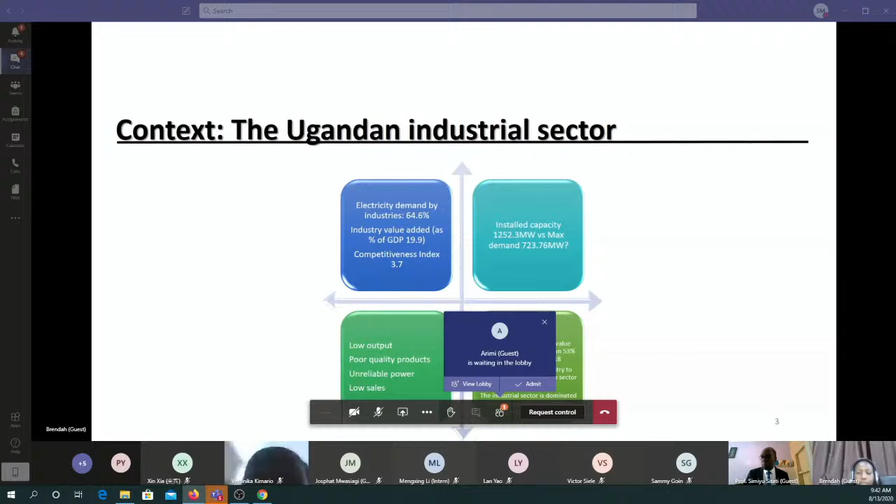Ladies and gentlemen, this study's aim was to examine how electricity consumption influences industrial output. This study was also guided by the following methods and materials. It used time series data, which was obtained from World Bank surveys, including the World Bank Doing Business 2019.

Time series have a little bit of limitations, and one of them is spurious results. So we managed this by testing for normality using the Jarque-Bera statistics. We also tested for stationarity using the augmented Dickey-Fuller test for unit roots. And we went ahead to carry out a co-integrated vector autoregression to estimate the model, which we used to run a long-run relationship between industrial output and the other variables: electricity consumption, education, and labor employed.

Ladies and gentlemen, these are our key results. From the results, we discovered that electricity consumption matters for these industries to develop. Education is very key, and also labor employed is very key. From this model that was estimated, we have an adjusted R squared of 41.5%.

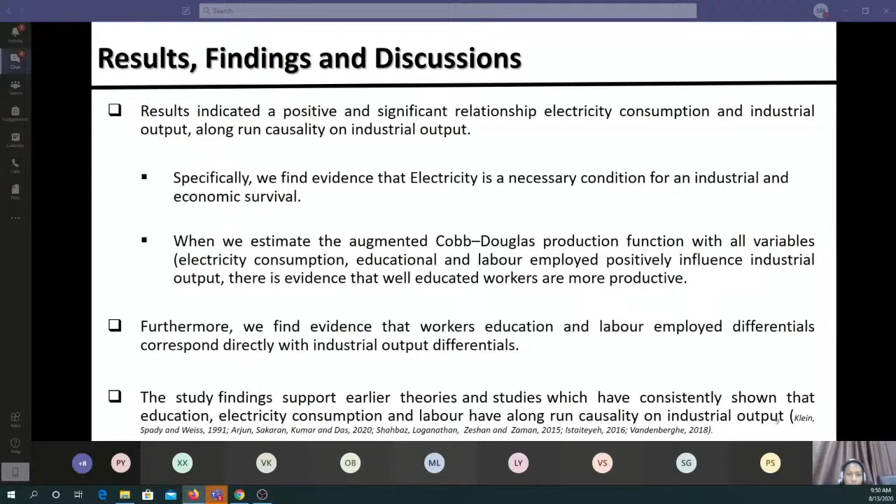So from the study, we therefore recommend, since electricity consumption matters, the government and policymakers should invest in consumption mechanisms such as through subsidies, so that the current electricity tariffs can be affordable to these firms, but also provide reliable electricity supports, because currently the main source of electricity that we have is from hydro, yet we know that there are other many alternative sources that can supplement or help industries to go on.

But we also recommend that there should be joint industry energy inter-service task forces, whereby our regulators in the energy sector should really be in touch, should encourage and train these industries to access and use electricity so that they can achieve sustainable production and consumption.

And then, since we found that labor employed also matters, or has a long-term relationship on industrial output, we also recommended that there should be focused efforts on the labor employed mechanisms that can help these firms to increase productivity, such as accelerating learning processes for dynamic capabilities at all levels, that is both micro, meso, and macro levels of these industries.

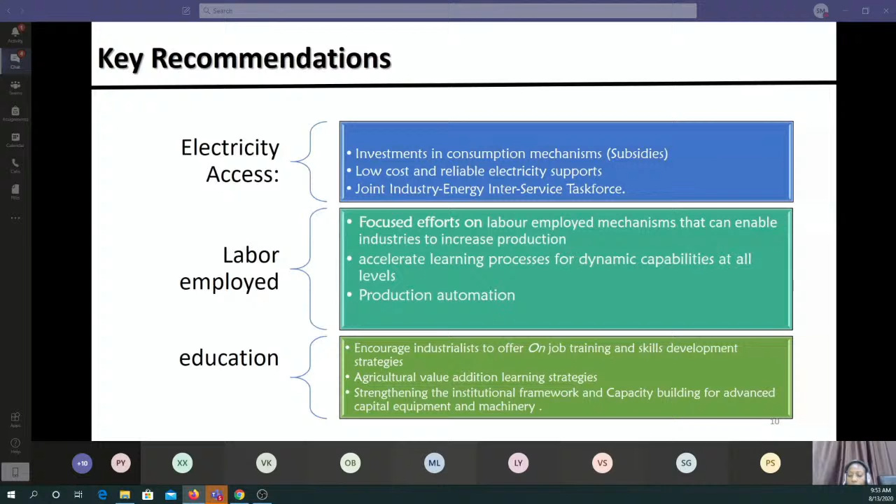This is for policymakers and capacity building for advanced capital equipment and machinery to enhance production automation. And when all this is done, we highly believe that industrial output will be achieved by these industries.

So we go on to conclude by saying that the study results suggest that industries that consume electricity will actually have a higher output than their counterparts. And we also conclude that well-educated workers with productive labor employed will produce more because they contribute more to the firm output. And the key positive result that emerged from the findings is the important role of electricity consumption, holding other factors constant.

So the results imply that the estimated results from our vector error correction model provide a good estimate of a real industrial output differential, at least for workers in the agro-based industries sector.

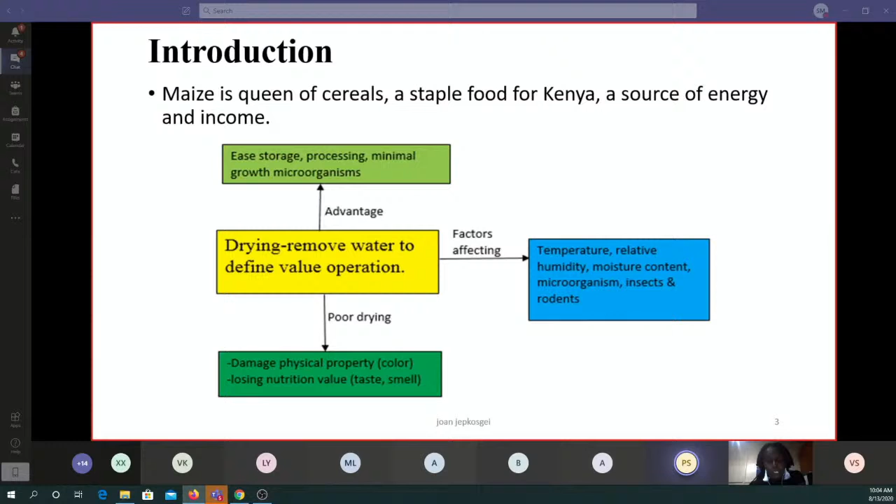Factors which affect drying include temperature, relative humidity, and moisture content. The aim of this research was to design and fabricate a heating system using solar evacuated tubes to produce heat that can be used to dry farm products.

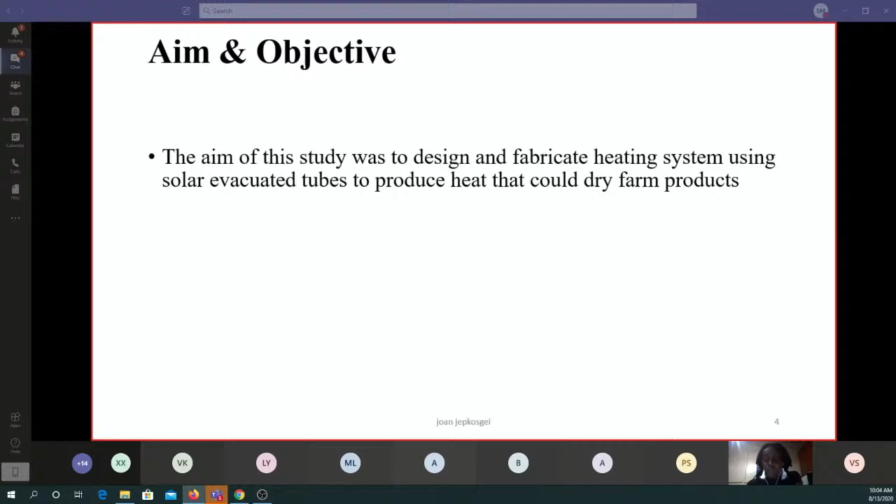Justification: drying is classified into two types, natural drying and mechanized drying. In natural drying we have sun drying, which includes spreading the products over a flat sieve, plastic sheet, or cement. The disadvantage is that the products will be exposed to insects, rodents, birds, or even rain showers during the rainy season.

We can also use in-crib drying, which is storing the product in a perforated room. The disadvantage is that it takes a lot of time to dry because the products are already packed and there's low airflow. In mechanized drying we have shallow bin, shallow layer, bin, batch-in-bin, and fluidized beds. The disadvantage of this is high energy and fuel consumption.

We have a group of solar dryers which falls under direct solar dryers, which commonly use the greenhouse effect, or indirect solar dryers, which use solar flat plates or the solar evacuated tube, and mixed mode solar dryers, which combine both direct and indirect. The disadvantage of this is high installation cost, and it also depends on sunshine.

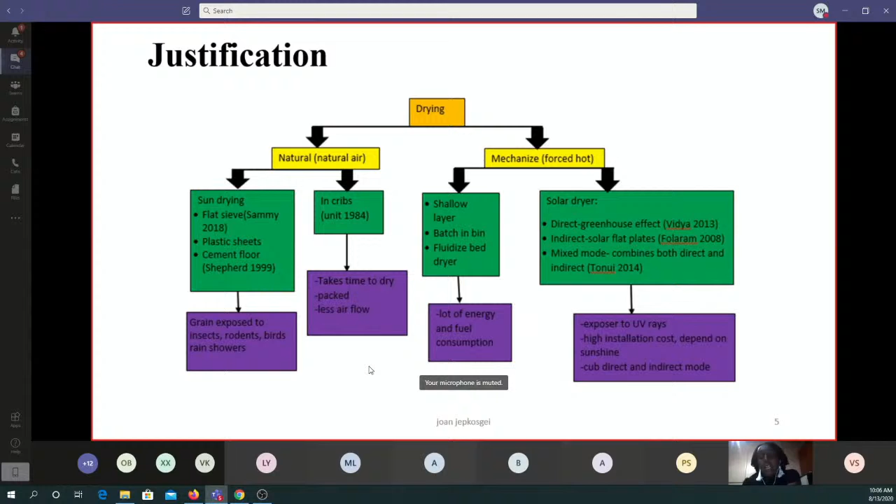For my system, I had to find a solar evacuated tube and also create a manifold.

My solar evacuated tube specifications include that it's made up of a special selective coat, made of aluminium, with an internal diameter of 47 millimeters and external diameter of 0.057 meters. It is a one-open-ended tube with a length of 1.8 meters, and it has an absorbing area of 3.7 meters square.

The manifold is made up of a frame made of wood, with measurements of 0.74 by 0.1 by 0.196 meters. This was to hold the tubes in place and keep them safe from damage. I also had a circular pipe made of aluminum, which is a good conductor of heat.

So how does this system work? Air is blown into the system by the blower. This air enters through the aluminum pipe and out through the internal part of the solar evacuated tube, then into the chamber where we can see the circular pipe, and then out.

The temperature being measured was the environment temperature, which is the ambient temperature, and the temperature we get at the end after it has gone through the solar evacuated tube system.

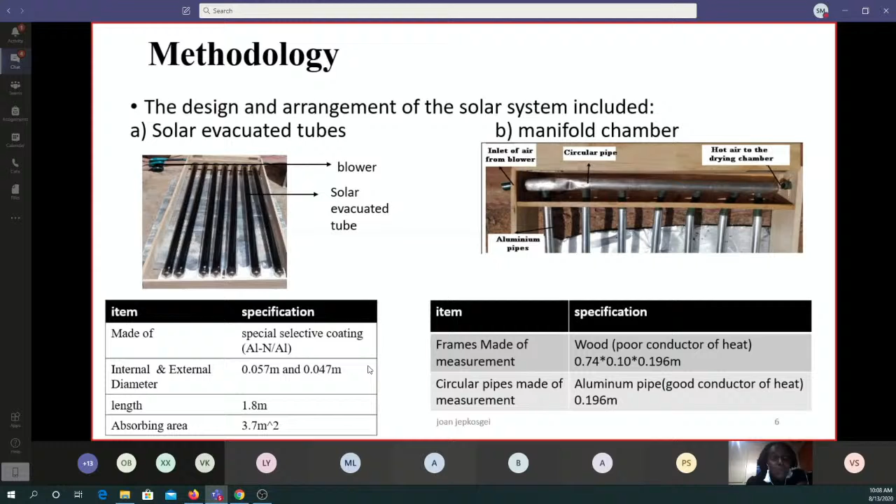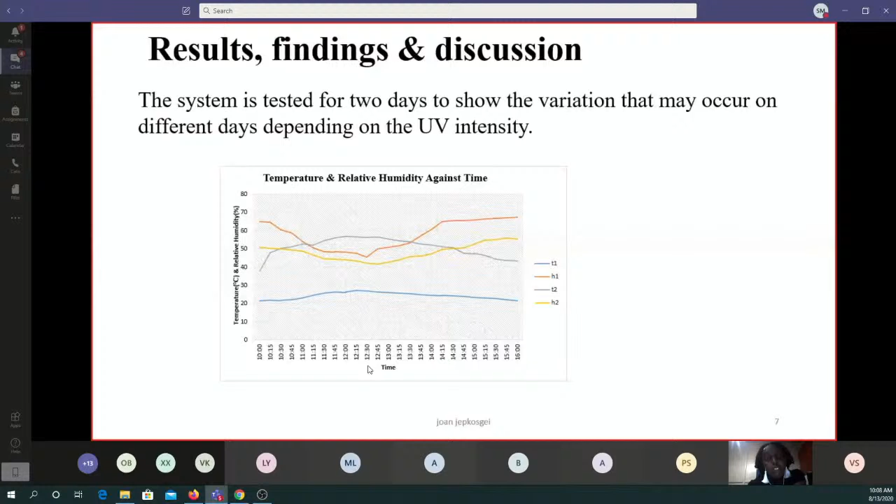This is the graph that we got; the test was done for about 2 days, because different days have different UV intensity, so we got different temperatures and relative humidity. At the inlet, the temperature was as low as around 21.7, but as the day progressed to around 12:45, the ambient temperature was 26.2, and in the evening around 4 p.m. the temperature was 21.5.

The relative humidity at 10 a.m. was 64.7, which decreased at 12:45 to 48, and at 4 p.m. it was 67.2.

After passing through the system, the temperature was able to increase as time passed by. In the morning at 10 a.m., the temperature of 21.7 was raised to 37.5; at midday, it was raised from 26.2 to 56.7; and at 4 p.m. it was raised from 21.5 to 43.6.

So the relationship was that relative humidity was dropping as the temperature was increasing. Hence, when the moisture was dropping, this could allow more room for the air, if used for drying, to absorb moisture from the product being dried.

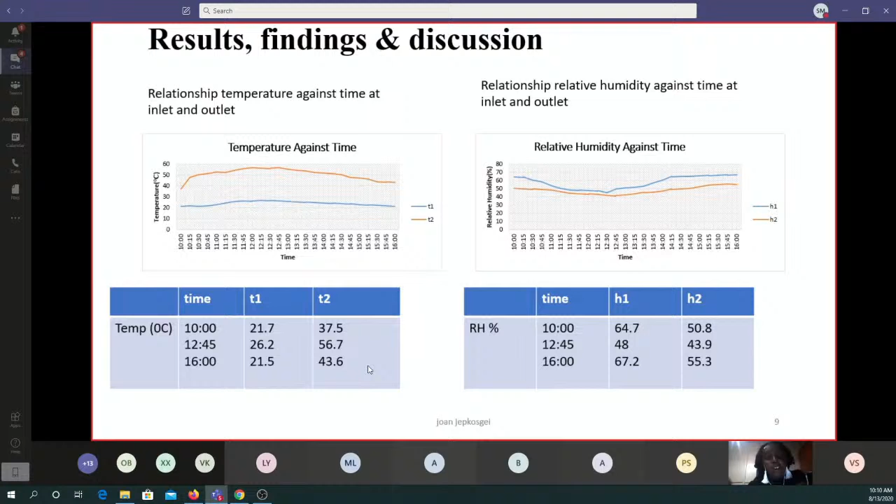So from my research and the variation, I was able to fabricate and increase the temperature of the air to the highest temperature, which I got 56.3 degrees, and the relative humidity, which dropped to 42.1 in the midday. From my finding, the temperature needed to dry maize grain is between 30 to 60 degrees, of which I was able to get 56.3 degrees, which I believe means my system could actually dry a farm product.

Hence, I would recommend that people use solar evacuation, or research can be done on using a double open-ended solar evacuated tubes. So there is my reference.

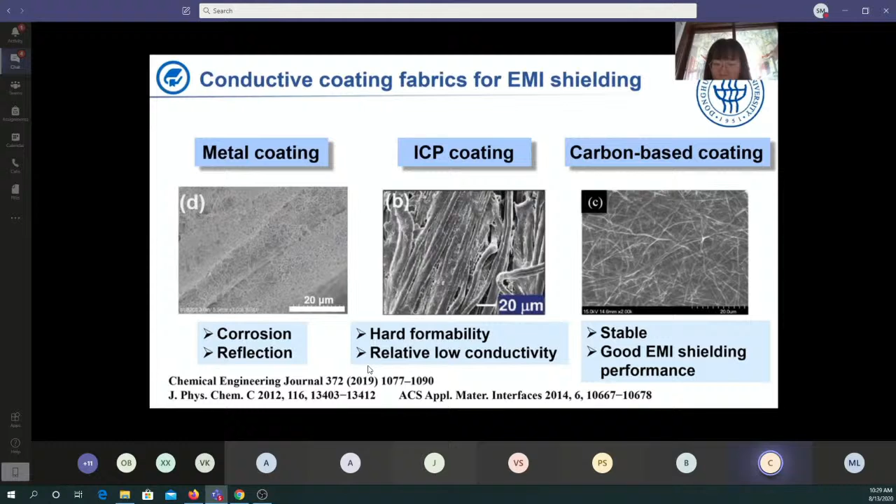Lightweight and high performance are two characteristics for the next generation of EMI shielding fabrics. From the equation for shielding efficiency, we can see that higher conductivity will result in higher shielding efficiency. But for the nano composite, the content of the nano fillers is always low because of the processing steps.

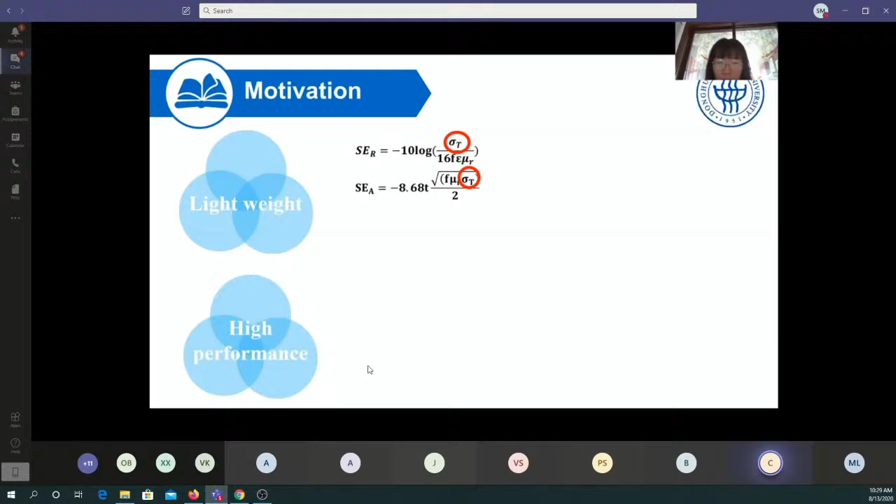Therefore, for many researchers, they will increase the thickness of the coating, which will decrease the performance and increase the weight. So if we want to achieve lightweight and high performance shielding materials, we need high conductivity with no added thickness of the coating. Optimization of coating structure is one important method to achieve lightweight and high performance EMI shielding coatings.

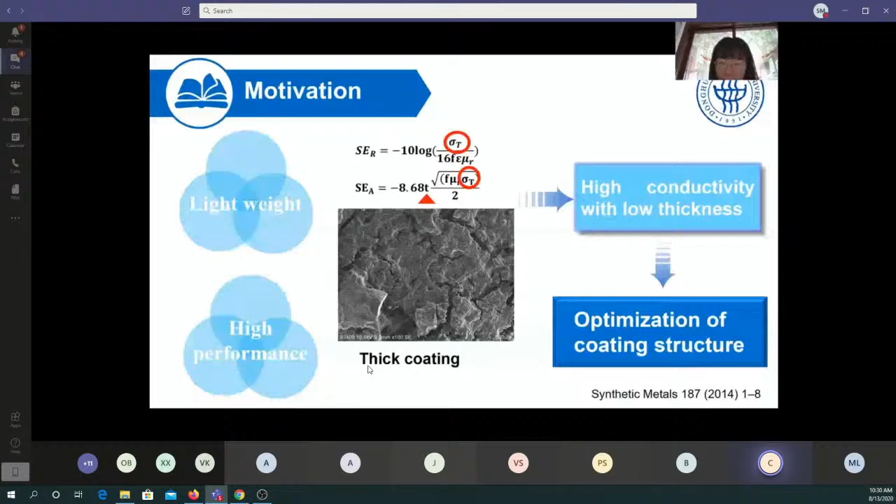In this way, we use a layer-by-layer assembly for CNT coatings. Here, we use CNT and PAH as a building block for EMI shielding fabrics, and the obtained fabrics using a high CNT content reached 85.4%. However, the EMI shielding efficiency of the fabric only reached 0.5 dB, while the high content CNT only resulted in poor EMI shielding performance of the fabric.

We also checked the conductivity of the materials. The conductivity of the fabric is low. Even after 15 cycles of assembly, the conductivity was only 0.4 Siemens per meter. To solve this problem, we use

capillarity-assisted assembly for CNT coatings. For this method, instead of rinsing the fabric in water to remove the physically absorbed CNT on the fiber, we dried the fabric directly to absorb the CNTs and PAH on the fabric, which increases the deposition of the film. The mass of the deposition of the film was dramatically increased by using the capillarity-assisted assembly.

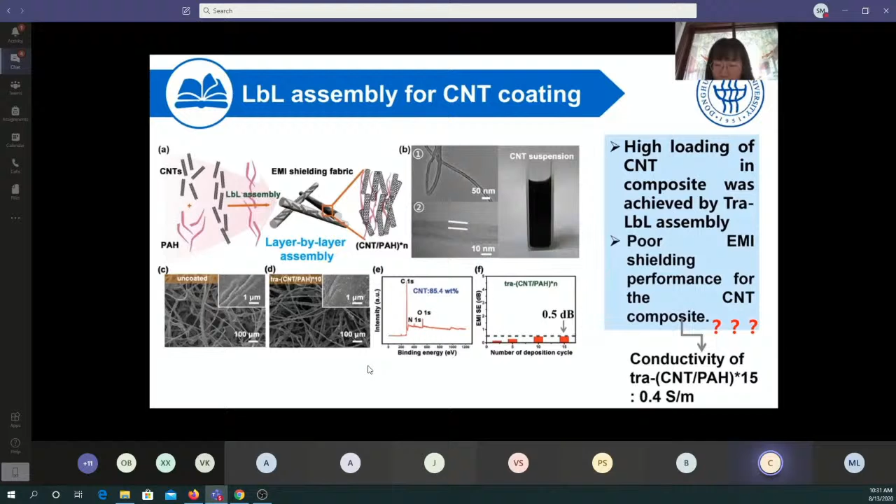performance of the fabric. After the first deposition cycle, the axially aligned CNT were prepared, and they are well aligned with the axis of the fibers. Thickness of the coating is 1.5 micrometers, which is among the thinnest thicknesses of conductive coatings.

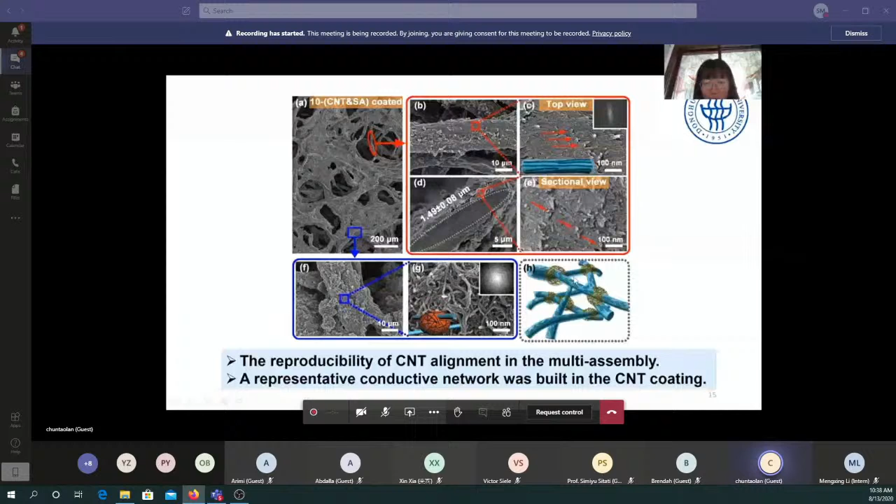And we also notice that at the junction of two fibers, the CNT here is randomly distributed. Coating here can connect the two fibers to build a conductive network in the CNT coatings to further extend the fiber, and we also find that the aligned CNTs contribute to electron mobility in the axial direction of each fiber. Also, when compared to the randomly distributed CNTs in the fabric, the well-ordered CNT coatings show 81 times higher conductivity than the random CNTs.

Also, the fabric's electrical conductivity is assembly cycle dependent, and after 50 cycles of assembly, the sheet resistance of the fabric reached 9.9 ohm per square, which is comparable to commercial carbon cloth.

It is notable that the carbon nanotube fabrics show isotropic electrical properties by the IV curve. This is because of the random distribution of fibers in the nonwoven fabrics, and the isotropic electrical properties is important for the practical use of the fabric.

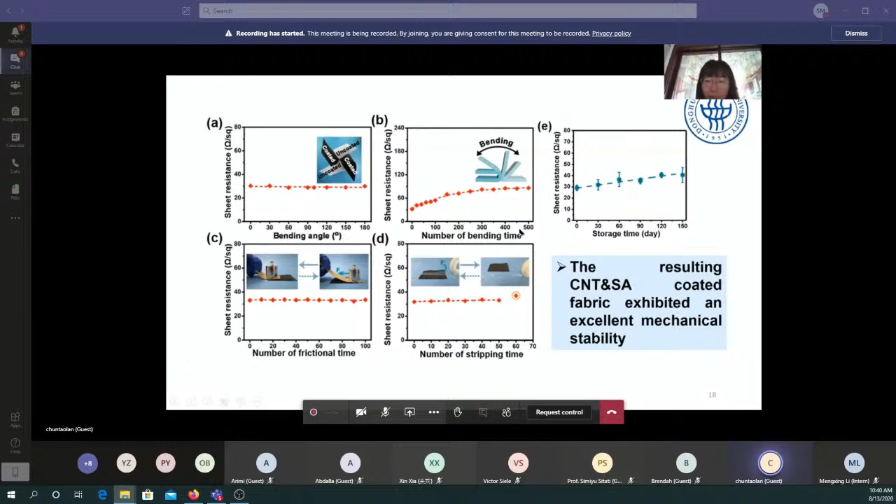This coated fabric exhibits good EMI shielding efficiency, and after 20 assembly cycles, the fabric exhibits an EMI SE of 21.5 dB in the X band and 20.8 dB in the Ku band, which already meets the commercial requirement of the EMI shielding fabric.

This high-efficiency conductive network in the fabric generates an excellent EMI shielding effect with the aid of the multi-reflection behavior of the fabric, and this well-ordered coating interacts strongly with electromagnetic waves. And also, the fabric should have good washing stability after the SA cross-linking.

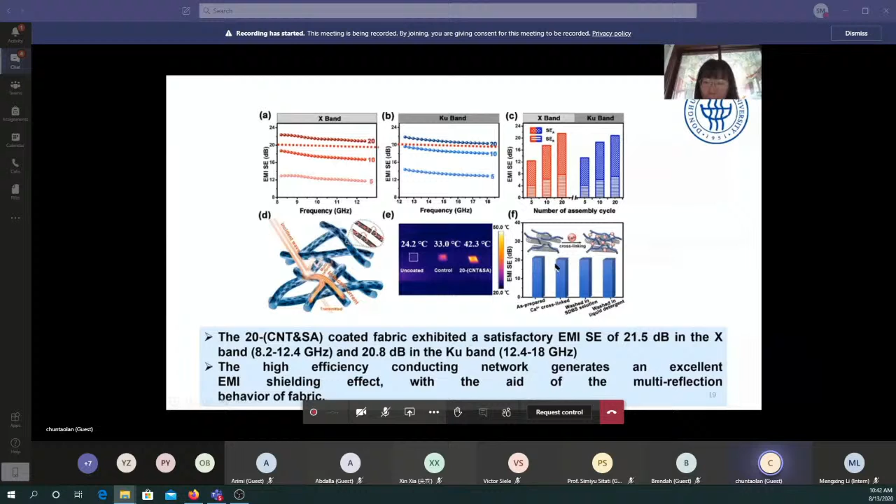The stability shows the practicalness of the fabric.

In conclusion, high loading of carbon-based composite coated fabrics with high EMI shielding performance and ordered conductive network coating is significant for electrical conductivity and the EMI shielding performance. The optimization of the structure is one of the most promising strategies to realize lightweight and high performance, which are two essential characters of EMI shielding coating fabrics.

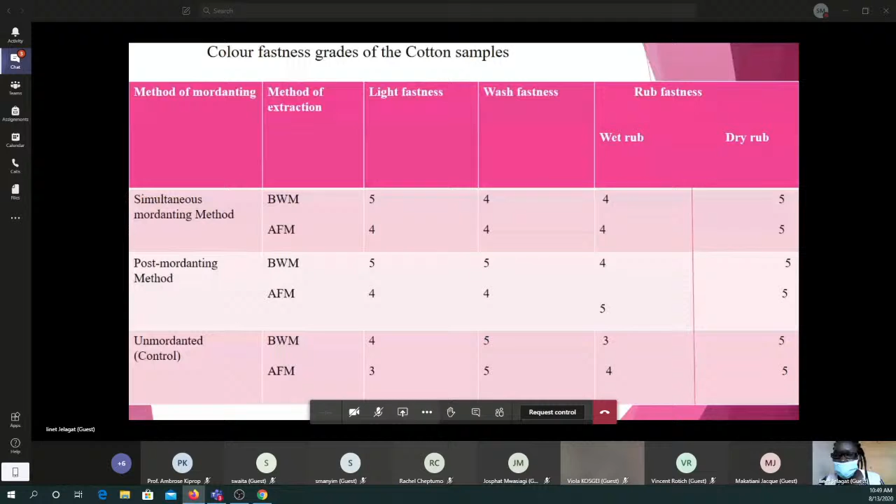On rub fastness, there was no change with fabrics dyed with extracts from an ammonia fermentation method on simultaneous mordanting, while post-mordanting increased slightly from good (4) to excellent (5).

Leonard, you're breaking. We are losing you in between.

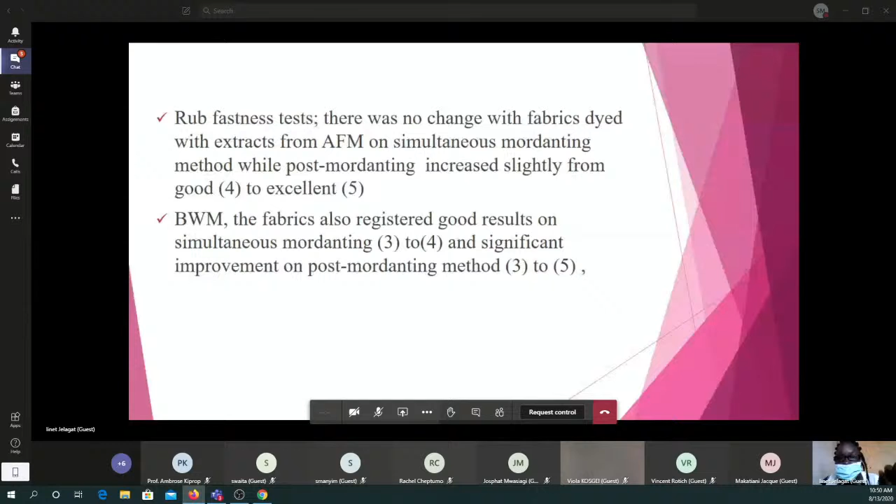Boiling water method is an acceptable standard grade scale of this fabric, are from 3 to 5, of which it all achieved from that 3 to 5. The main findings of this study is that the extraction of this natural dye is economical and produces acceptable results.

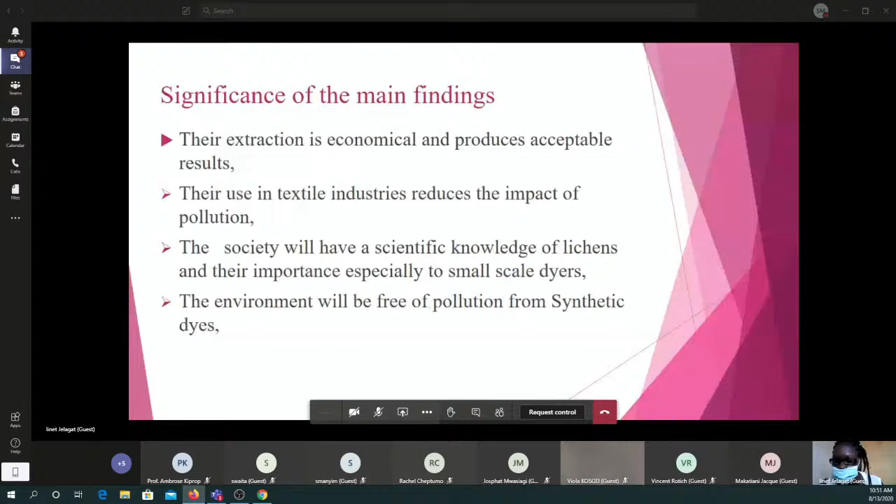In conclusion, the phytochemical screening revealed the significance of lichen Flavoparmelia caperata, showing the presence of phytochemicals such as flavonoids, tannins, terpenoids, saponins, and fixed oils, steroids, and anthroquinones and alkaloids, which may be the basis of its dyeing properties.

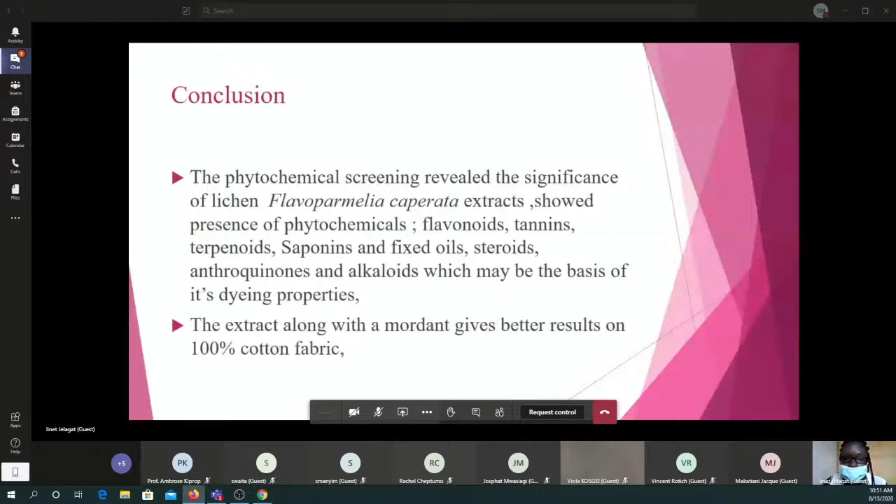Another finding is that the extract, along with the mordant, gives better results on 100%. We recommend further studies on isolation and characterization of compounds identified in phytochemical screening, and also that other fabrics, apart from cellulosic ones, need to be dyed with dyes from this lichen.

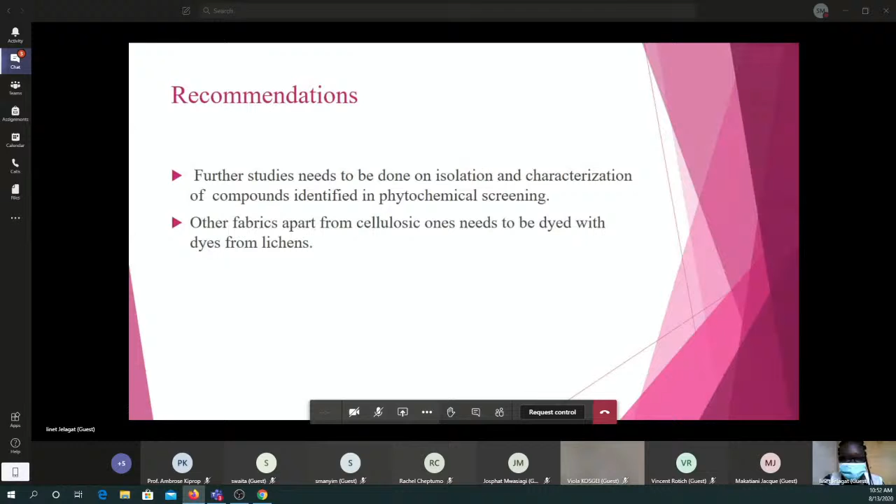The authors would like to acknowledge the Africa Center of Excellence in Phytochemicals, Textiles, and Renewable Energy, that is ACE2 PTRE, for funding this work. Thank you.

Thank you very much, Lynette, for that very good presentation on lichens as a source of natural dyes. Now, participants, she's utilized her time well, so kindly, if you have any questions or comments regarding Lynette's presentation, let us post those questions to her through the chat. So far, no comment, no questions.

Maybe as we wait for questions, Lynette, I'm noting some link between your work and the one that Ms. Scholastica presented. I have the same concern I raised with Scholastica. When you buy a fabric, among the things we're interested in is perspiration fastness. Your work also seemed not to have included that, which I think is a very major quality, especially when trying new dyes on a fabric. So my concern is, why didn't you consider the aspect of perspiration fastness? Thank you.

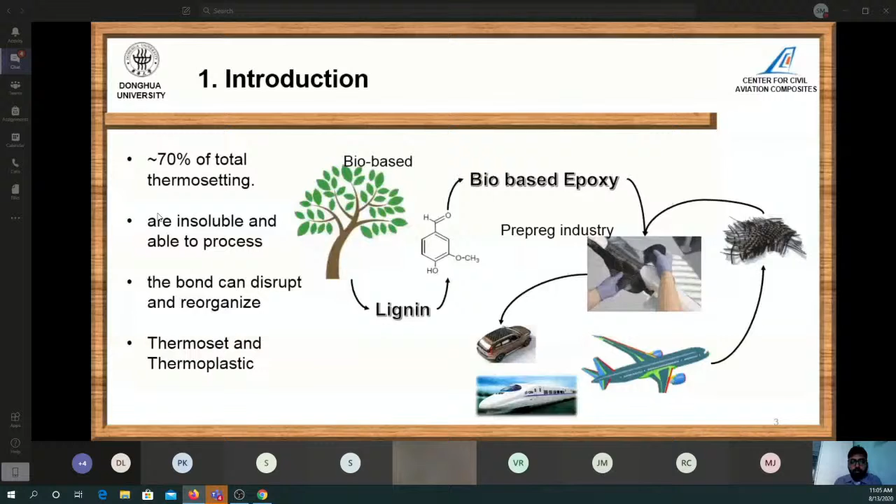This idea was actually coined in 2010 by the Bowman Research Group, who called it covalent adaptable networks. It was further extended a year later by Filip Du Prez's group, who worked on the reversible click reaction. Then in 2011, Professor Ludwik Leibler from France worked on transesterification reactions to develop this promising material, which they termed a vitrimer.

Professor Zhang et al. from the USA has also been working on this. These are the famous key research groups working in this area.

But what was the problem in this research? These groups could only achieve a limited glass transition temperature. For example, Raimondo et al. from Italy could only get the glass transition temperature to 90 degrees centigrade, and could not achieve a higher glass transition temperature while maintaining performance. So there was a limitation: the material should be recyclable as well as high performance, but existing research had this gap.

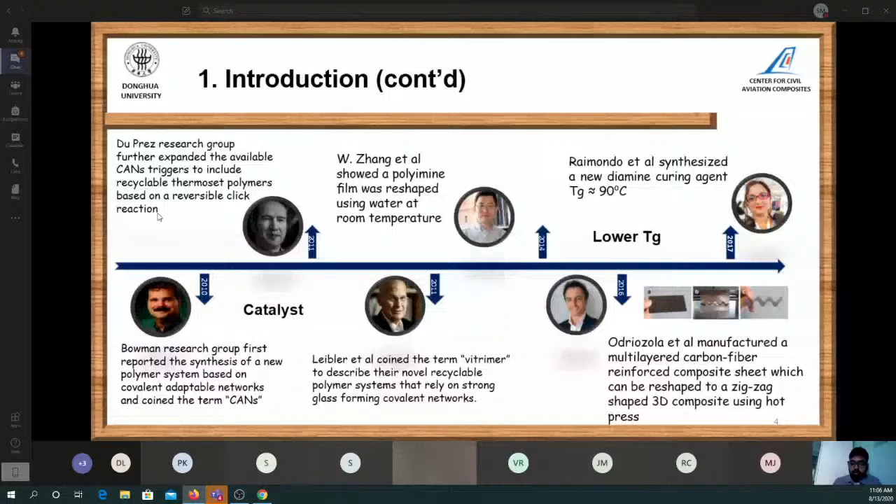So in China, many research groups have also been working on this, including Tsinghua Tongji University and groups in Guangzhou.

In Tsinghua University, they made many functional activating compounds. One example is a new type of vitrimer they call oligoaniline, which has 6 different functions: welding, recycling, healing, electromagnetism, electrochromism, and shape memory.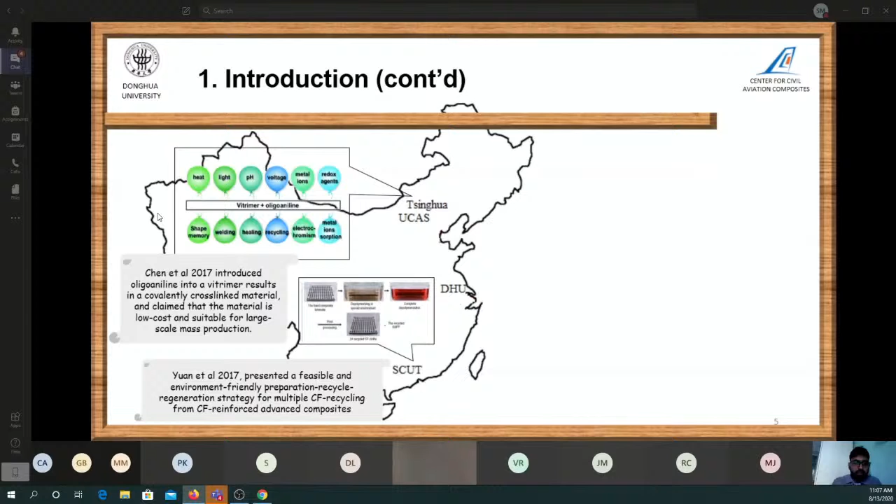In Tongji University, they also worked on this before, but the problem remains the same: the glass transition temperature was not as high as needed for advanced applications.

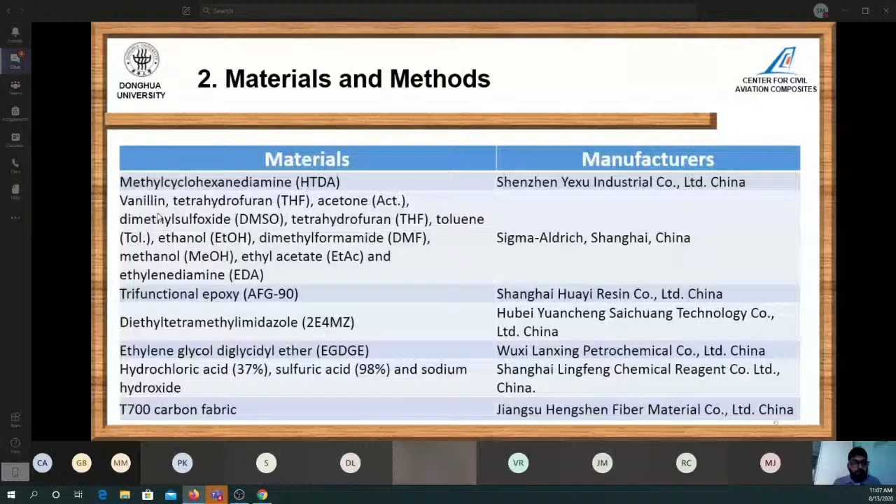Here are the materials we used for the synthesis of this new structure and new epoxy resin. All materials were sourced locally in China, and these are some of the equipment we used.

This is the synthesis scheme. We used vanillin, a bio-based and bio-derived lignin-derived compound, and reacted it with HTDA to produce VBI-HTDA, a vanillin-based imine based on HTDA. Then we reacted it with a mixed epoxy, including a diluent epoxy, to get the coupon.

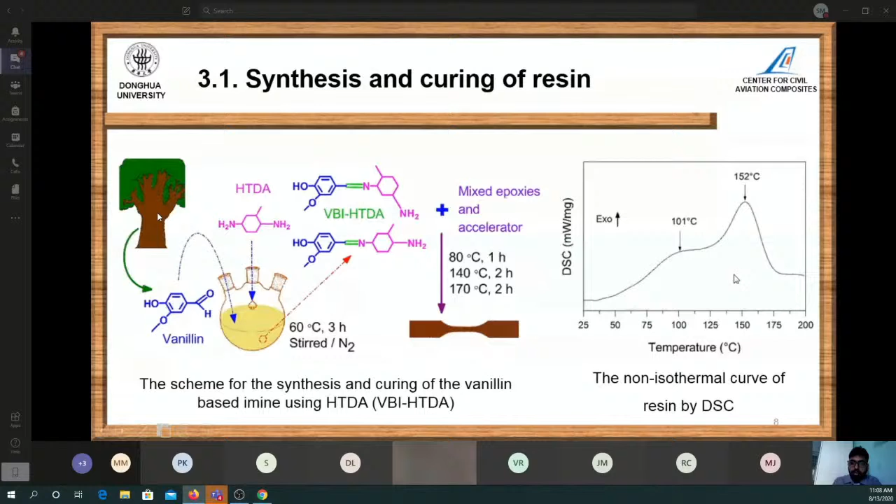The curing scheme is presented here: 80 degrees centigrade for 1 hour, 140 degrees centigrade for 2 hours, and 170 degrees centigrade for 2 hours. Here are the curing peak and curing temperature showing how much temperature should be given to cure this reaction.

We also confirmed this with HNMR. We analyzed the structure shown in the scheme, where there were two types, A and B, the structural monomers of VBI-HTDA formed during synthesis. We determined the ratio of A versus B to be 59.5 and 41.5 using HNMR, confirming the two main compounds.

We also did dynamic properties analysis, as well as CNMR analysis, which is shown here. Then we also worked on...

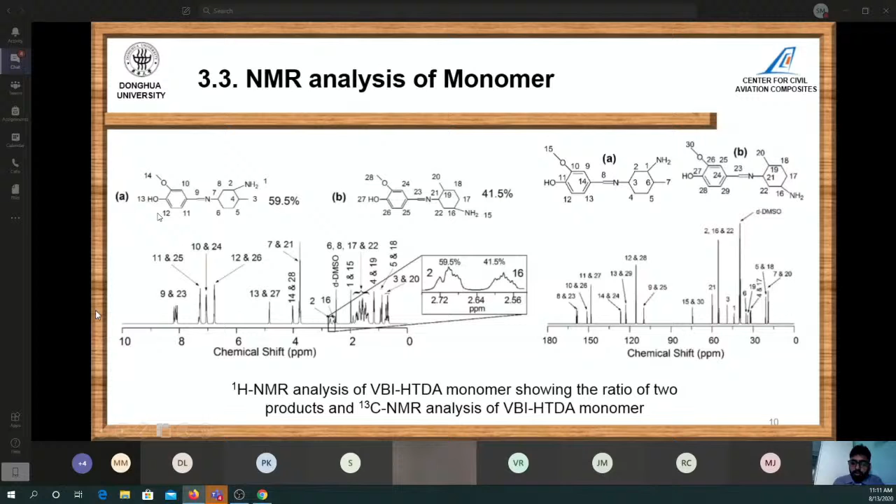We did the CNMR to guarantee the reaction occurred, then assessed the dynamic properties of the cured coupon, which showed high activation energy as well as high glass transition temperature. The vitrimer transition temperature was 54.34 degrees centigrade, while the glass transition temperature was quite high, around 131 degrees centigrade.

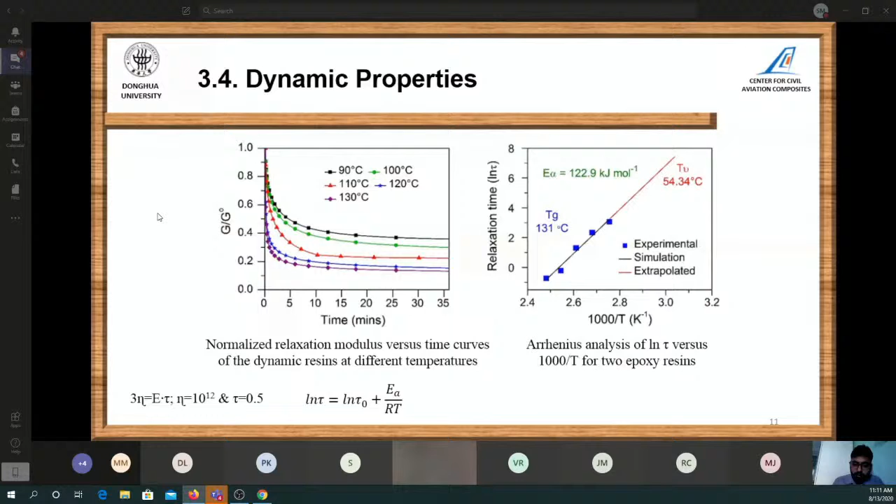This is the video we reprocessed to guarantee it has self-healing properties. You can refer to this video to see how we make this recyclable.

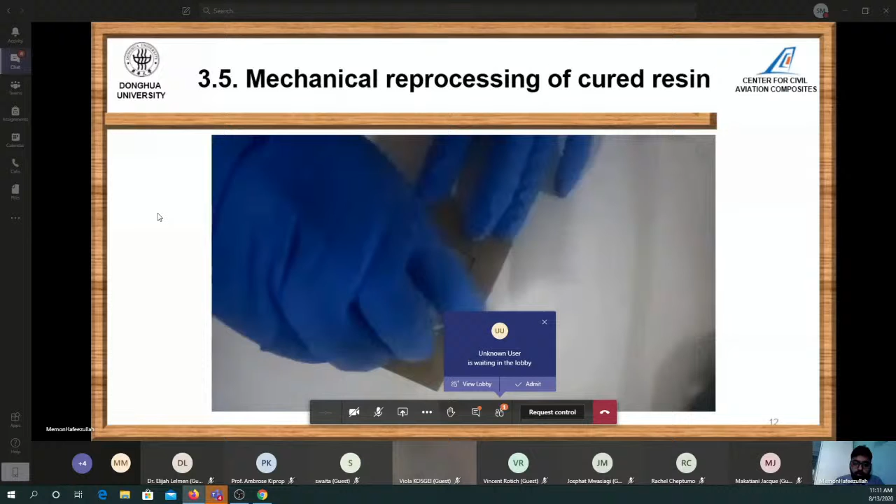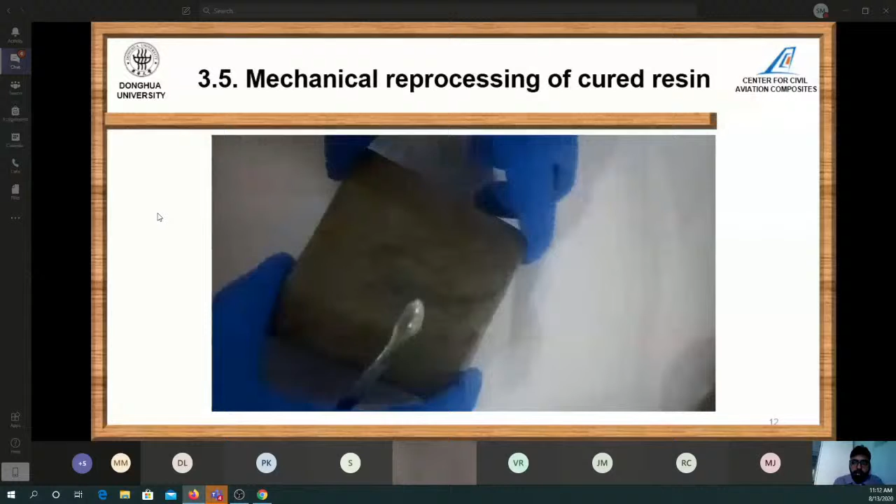First we crush the resin and put it into the mold, fill the mold, and put it in a hot press for a certain time, then the coupons were taken out. This was the scheme, and it could be recycled. I hope this video gives a clearer idea of what we have done.

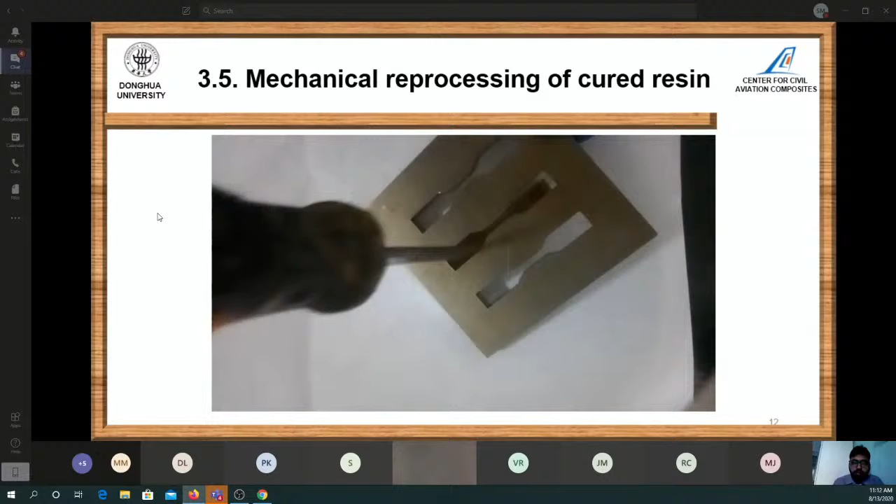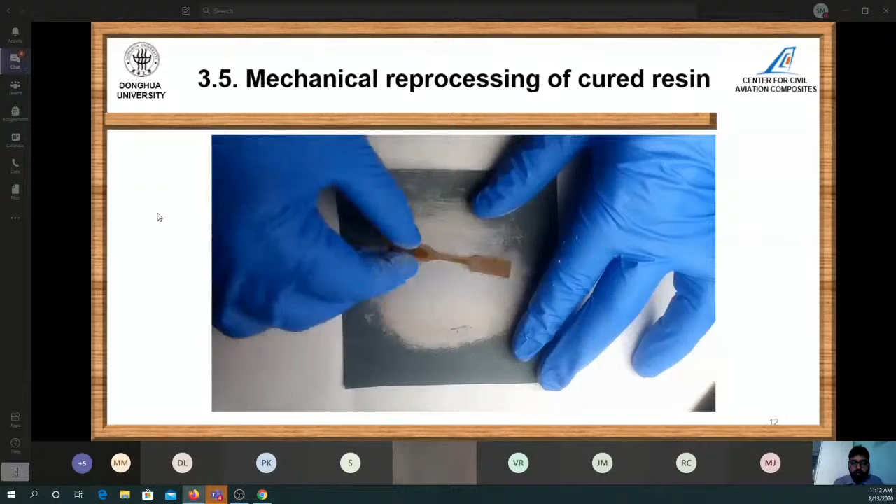The resin sample was taken out and polished to test again the tensile strength properties of the sample, and the sample was tested for the tensile test.

We repeated this process several times, and we believe small powders and large powders were combined together to make a recycled coupon, a recycled sample.

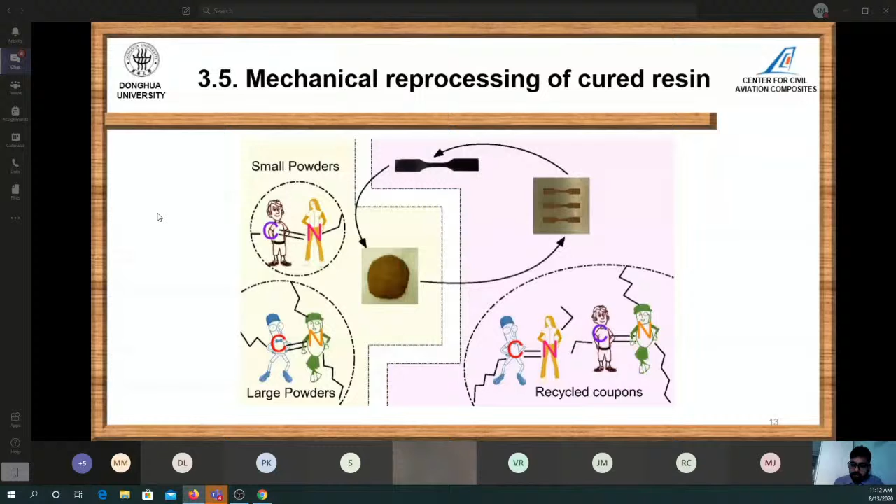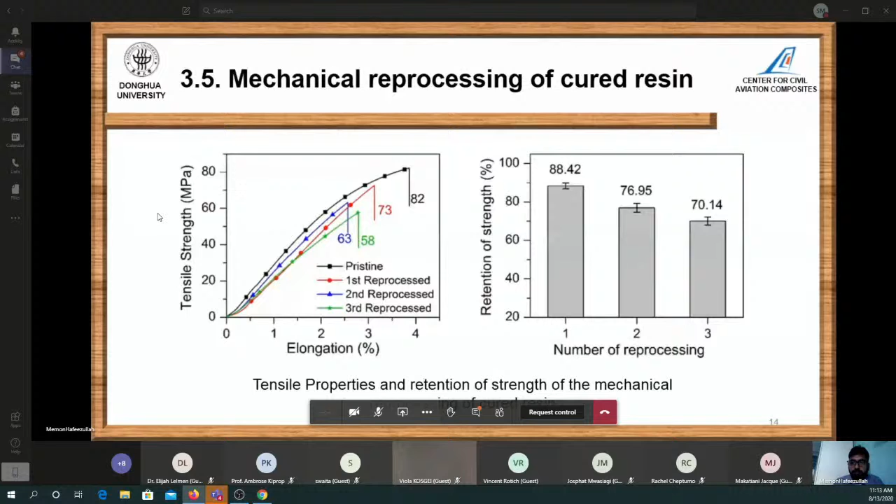This is the full recycling process for CFRPs, carbon fiber reinforced plastics. We dissolved the coupon into EDA and extracted the carbon fiber out, then tested it to see whether we can reclaim the carbon fiber from the composites.

Also, we boiled out the solution, and the powdered resin was tested for its tensile strength.

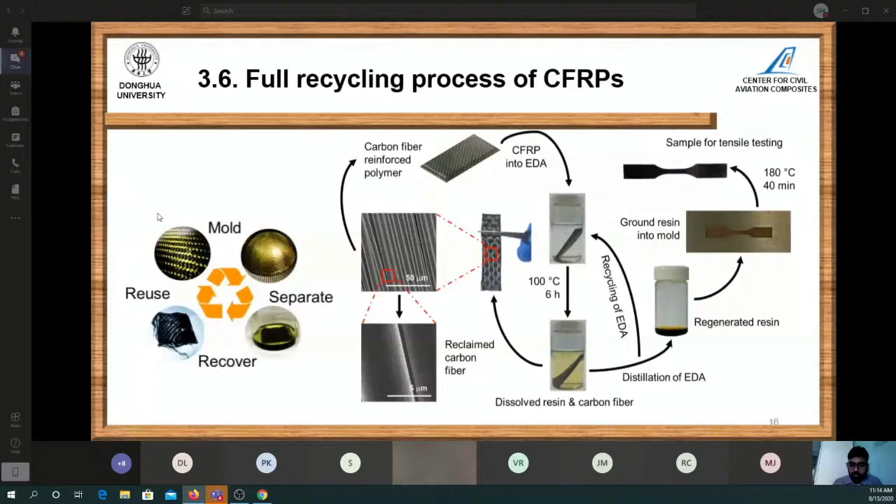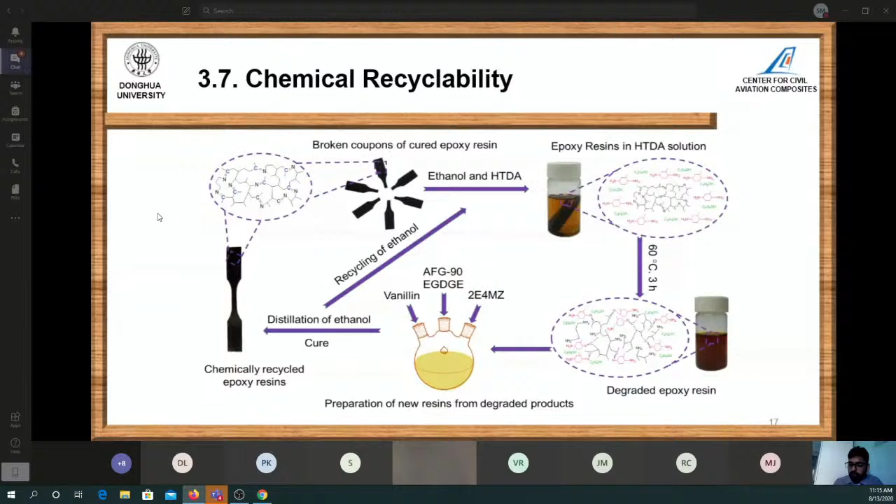We tested the chemical recyclability of the resin by adding more monomer inside it. This is the chemical recyclability scheme: the broken coupons of epoxy resin were dissolved again in HTDA with vanillin and AFG90, the epoxy resin and catalyst were added, and the distillation of ethanol was guaranteed, so that it can be a fully closed loop recycling.

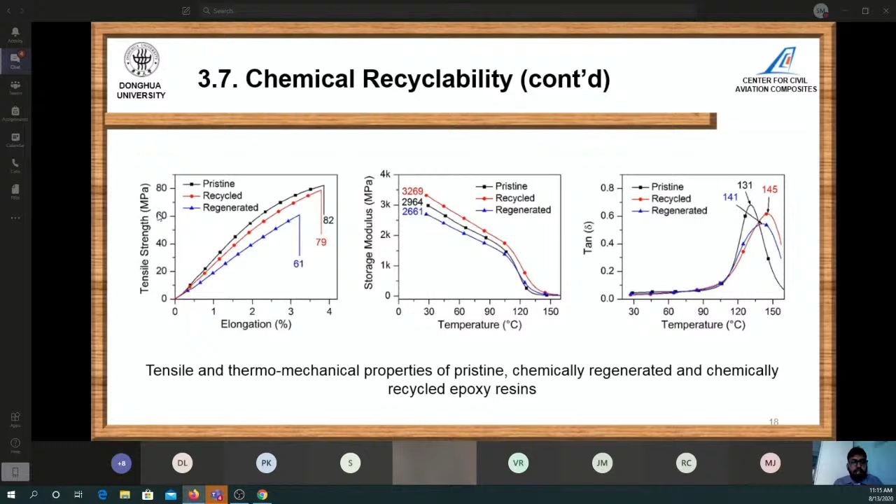This is the chemical recyclability results. The regenerated resin was not enough better, but the recycled one is quite similar to the pristine one.

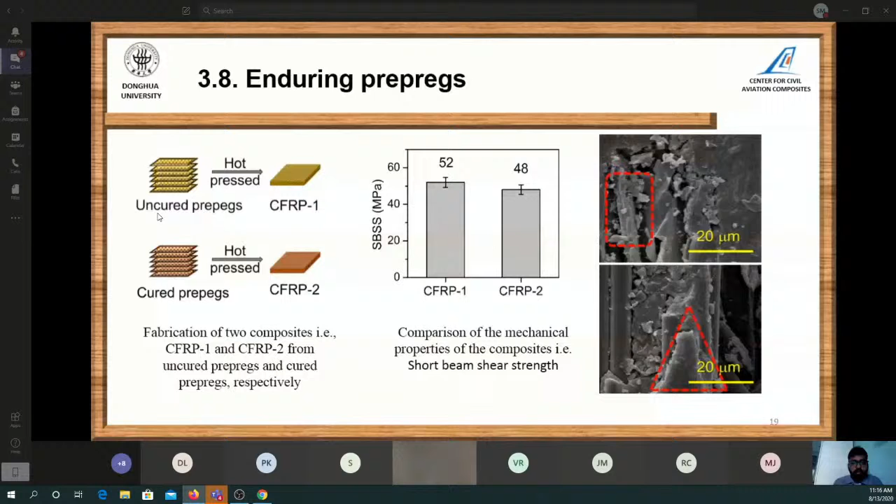These were the prepregs made into two types of composite coupons: one from uncured prepregs, and the second from cured prepregs, and we got almost similar interlaminar shear strength. This resin also had good solvent resistance, lasting 96 hours in different solutions including acid and alkali.

So it has very good solvent resistance as well as very good thermal stability. We did the thermal stability analysis, and the char percentage was quite similar for the pristine, regenerated, recycled, and reprocessed resin. So we can say there was no chemical change in the structure, just a shuffling of the bonds to be recycled.

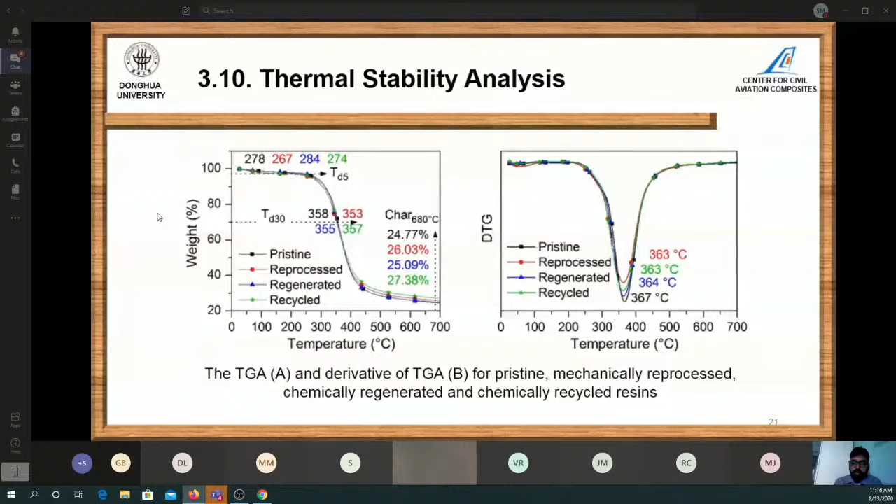So these are the conclusions: the bio-based resin had tensile strength as high as 82 megapascals, and the glass transition temperature was 131 degrees centigrade with retention efficiency of 90%, achieving almost 100% closed loop recycling. The additional benefit was that it was thermally stable and solvent resistant with enduring prepregs.

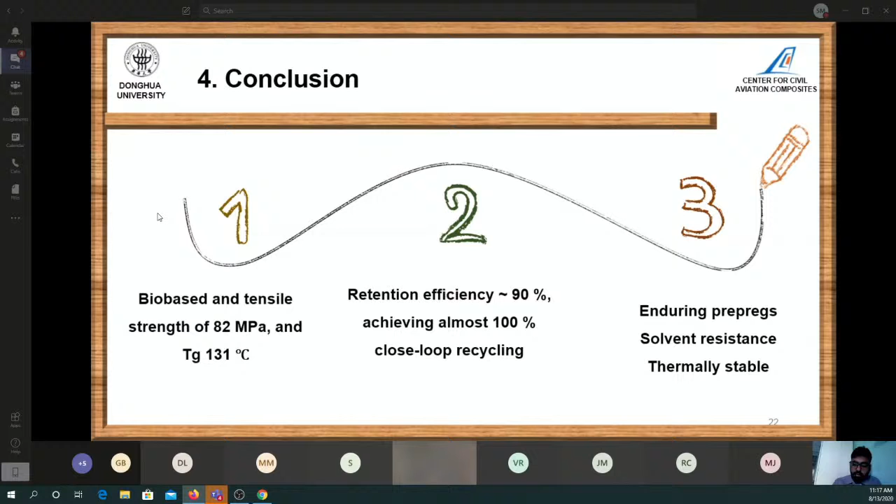So this is my research, which I have been working on here at Donghua University for more than around 4 years, including with my professors and co-supervisor. This is the end of my PPT. I believe any question or suggestion is warmly welcome. Any question?

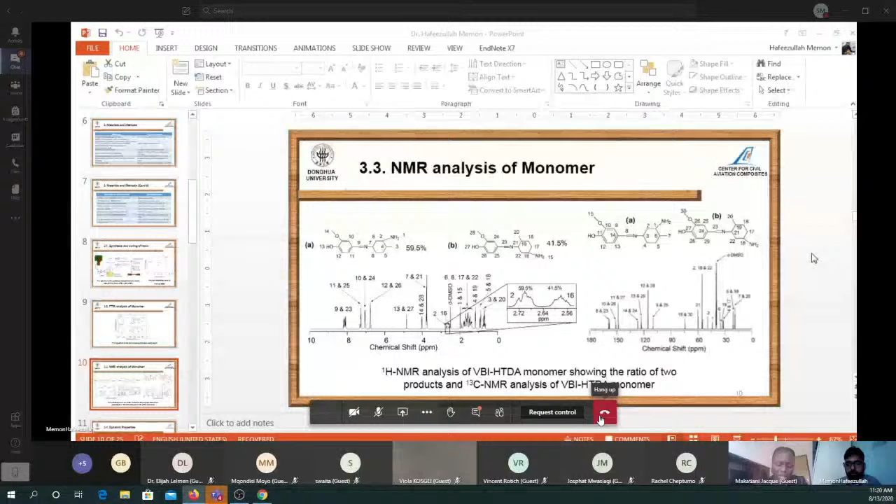Okay, thank you very much. I think we are just coming to the end of our session, and I really want to thank all the participants. I think from the 5 speakers, we've had a chance to listen to what we've been told about the health benefits of garlic, and then also the good properties that the various plant sources...

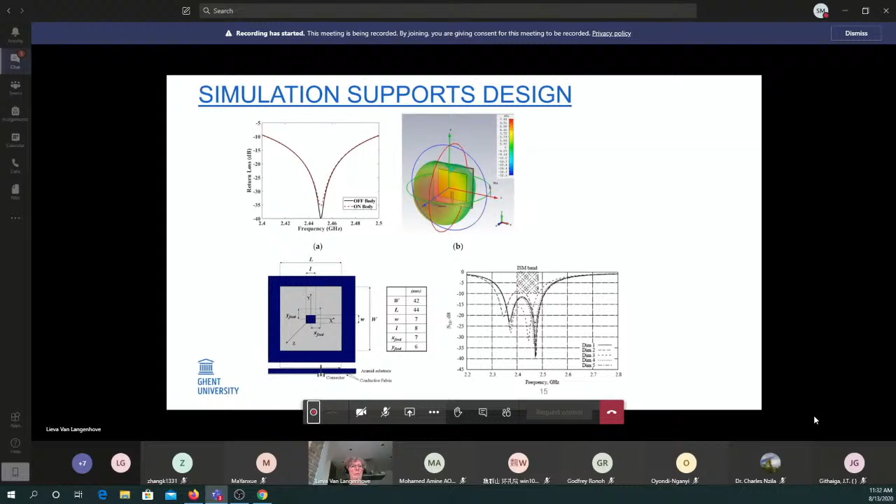In the lower left picture, you see an antenna and it has a hole in the middle. By inserting a hole, we can drastically broaden the bandwidth. This is something that you can clearly find by running the simulations. So this is how simulation is really helpful for creating good antennas.

The fabrication was by embroidery, lamination, and printing, and the testing is done in an anechoic room, of which you can see a picture here.

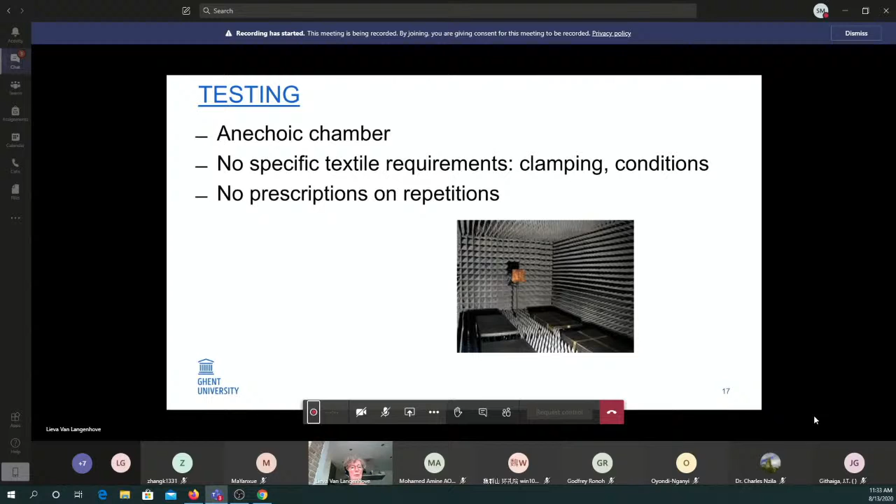It has no specific textile requirements. Well, the standards have no specific textile requirements because a standard antenna, a common antenna, doesn't have any textile characteristics. So there are no prescriptions regarding the clamping or the room conditions, temperature, humidity, etc. And also the number of repetitions is not mentioned because the variability of a standard antenna is way less. But for textiles, this is really important to take up in the research.

Then we also do some work on thermoelectricity. It has been explained already in the previous paper, so I won't repeat. The start of the work has been the thermocouple with copper and nickel materials.

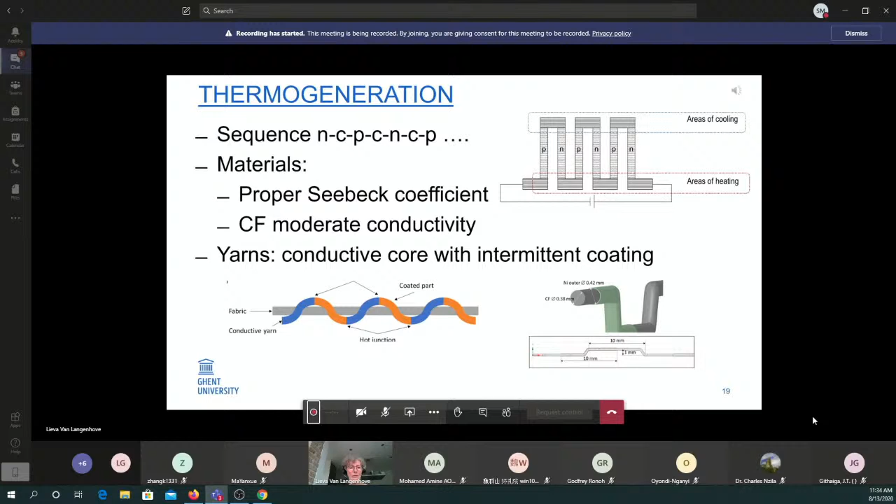So the concept we have chosen is a wire which is coated in dedicated intermittent areas with a second metal. So we have a conductive core coated with a coating at regular places. As you can see here, how it is inserted in the fabric and how it is produced.

The materials used, well, these are the materials we have studied: stainless steel, carbon fiber, nickel, polypyrrole, copper, and silver, and constantan.

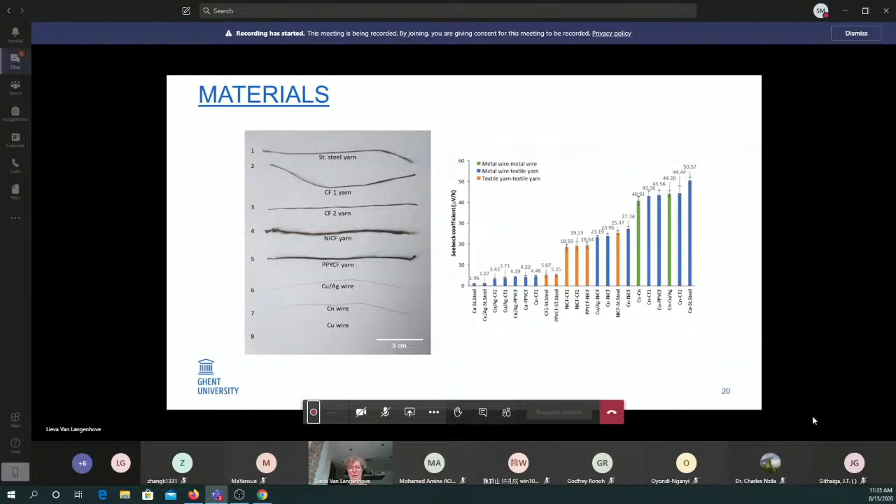And the carbon fiber has a moderate conductivity, which is needed to make sure the current is passing through the nickel coating in the dedicated area. And this allows creating such a thermoelectric effect by using a textile yarn inserted by a regular weaving process.

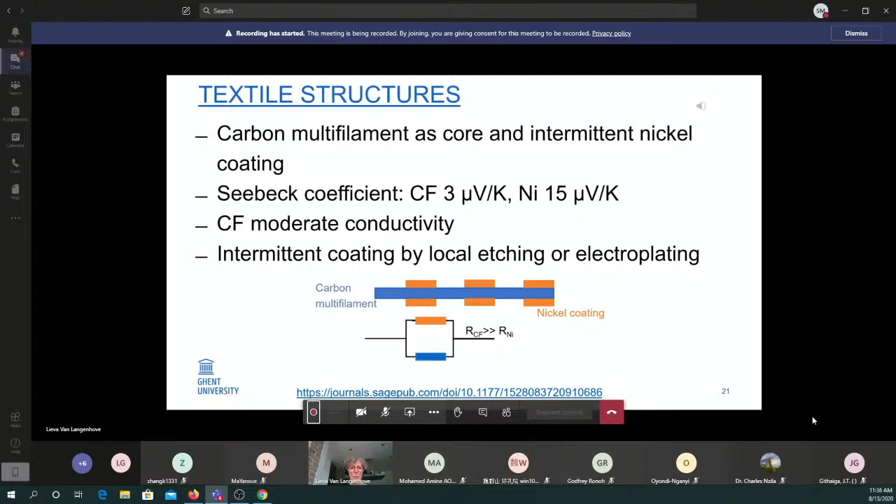The coating can be achieved either by local etching of a nickel coating on a nickel carbon fiber material, which can be just bought commercially via the internet, or by local electroplating of the nickel onto the carbon fiber multifilament.

How did the models help us here? Well, first, on a material level, just give us an idea on the maximum achievable output. The material impact, both considering the conductivity of the materials as well as their Seebeck coefficients, the dimensions of the whole system, and then for the modeling, we needed to do some simplification.

We also managed to show that the simplification of the multi-filament into a monofilament with the same cross-sectional area of the carbon fiber and the nickel coating is allowed. It doesn't have an impact as long as a good contact can be guaranteed.

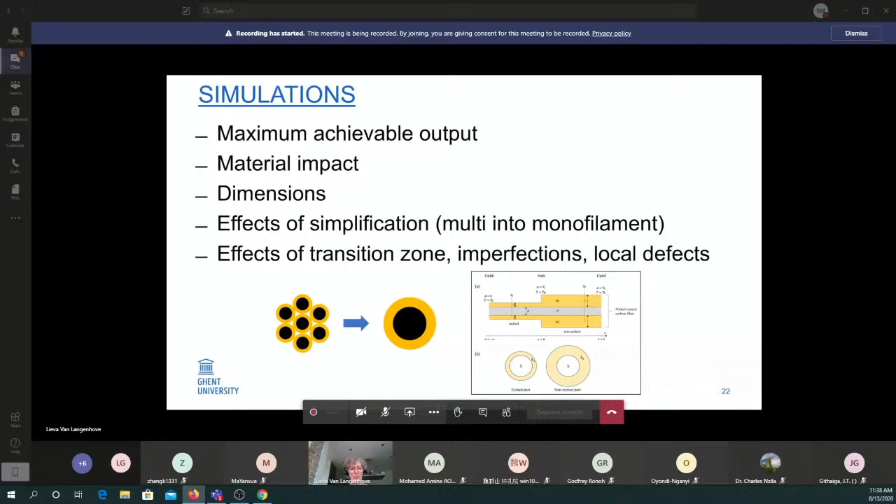And then also effects of the transition zone. You always have a transition between the carbon and nickel-coated carbon. In an ideal case, this is 100% sharp, and there is no nickel in the intermediate layers. But with the modeling, we can estimate what would be the effect if this is not the case. Also, the effect of imperfections and local defects and inhomogeneous areas are to be included.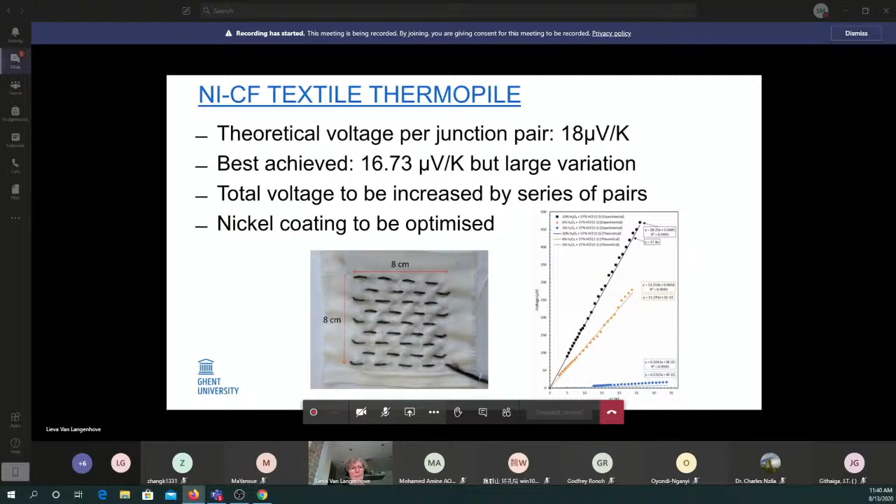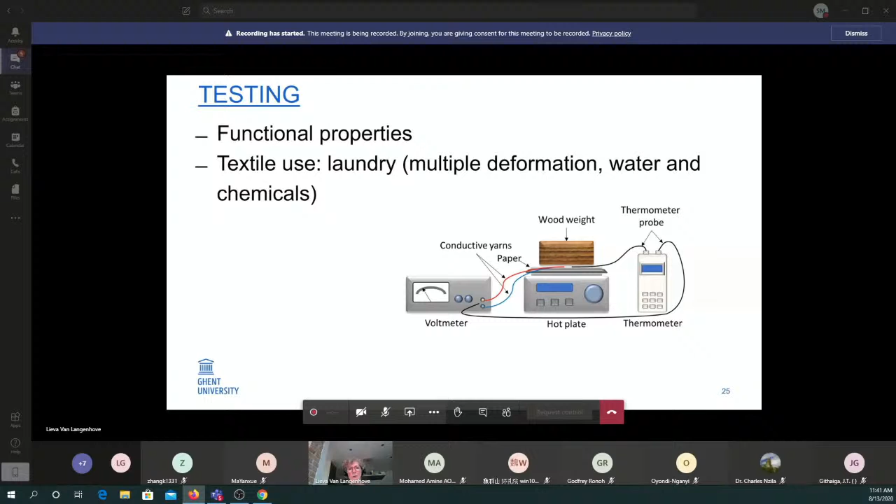Then the testing. The testing includes the functional properties and the textile use. Here also we had to develop methods for measuring the voltage and for creating the hot and cold side of the fabric. So we used the hot plate and allowed it to cool in air, so the ambient air was the cold side.

And then to conclude: the first general conclusion is that energy scavenging as well as storage can be done by textile structures using textile materials and textile processes, and various principles are feasible. We heard in other papers that other concepts are feasible as well.

We need an energy management strategy because energy is scarce and it's not easy to supply sufficient energy for powering a complete system. Modeling is useful, very useful to support the design phase. Test methods lack or need adaptation, and actually in November there will be an online conference on the topic of testing smart textiles and standards.

Energy solutions largely depend on the application. Just remember the baby suit, whereby for newborns the inductive solution could be proper, but for elder babies this is not feasible anymore. And reliability is an issue. The conditions of textile use are really harsh. We sit on them, we stretch them, we bend them, we throw them in a washing machine with water and chemicals. So this is always a point of attention.

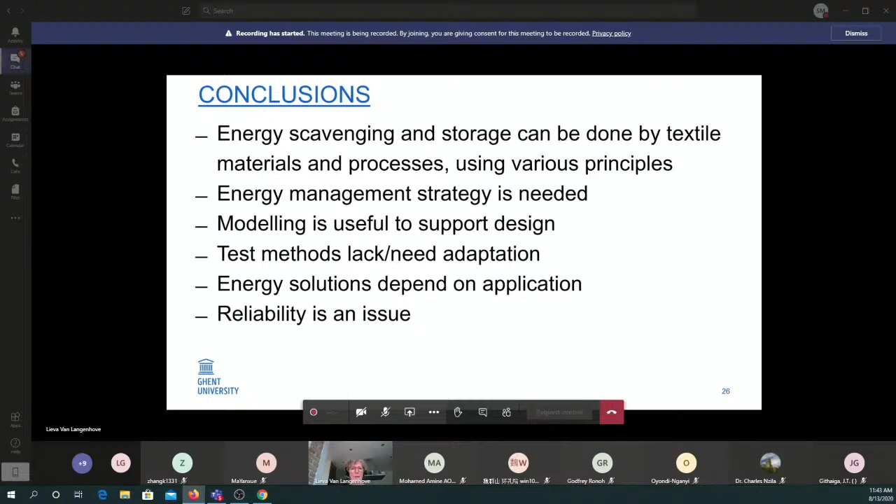So with this, I conclude my presentation. And if there are any questions, you can always ask them or contact me later, send me an email or a message, and I will try to help you. Thank you.

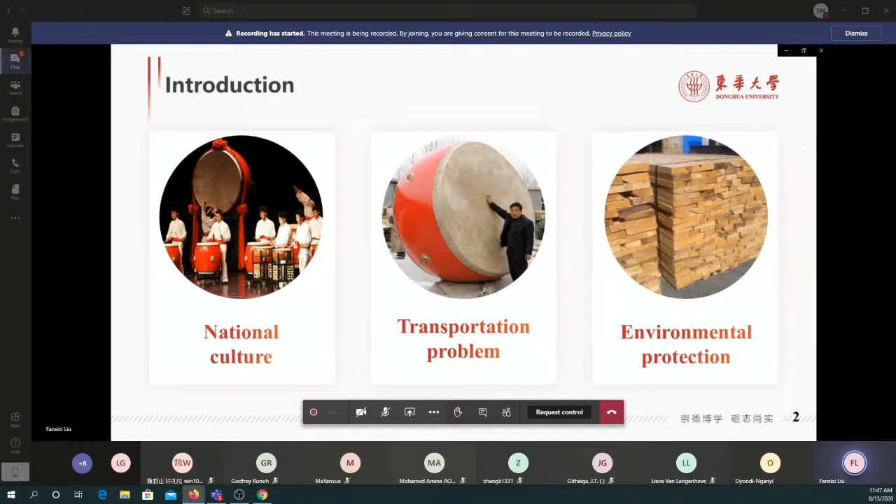The transportation is very inconvenient. Moreover, a lot of wood is needed to make drums, but forest is a very precious resource. To make 800,000 drums a year requires 400,000 square meters of wood, and 2.3 million 10-year-old trees will be cut down.

If not, the carbon emissions of 618,000 cars can be reduced, which is very important for environmental protection. President Xi Jinping said clear water and lush mountains are invaluable assets, but there are thousands of rivers and mountains between them. How to replace wood with a musical instrument is our job.

Using composite materials, such as man-made fiber and vegetable fibers reinforced composites to replace wood in musical instruments, has been attempted. It seems that composites are reasonably qualified for replacing wood in some musical instruments.

In order to replace wood with fiber-reinforced composites in this instrument, acoustic emission properties of composites have to be studied and compared with their wood competitors.

Drums need to meet some requirements, such as mechanical acoustics, dimensional stability, and processability. Especially the acoustic performance, we use 3 indicators to evaluate it, which I will talk about later.

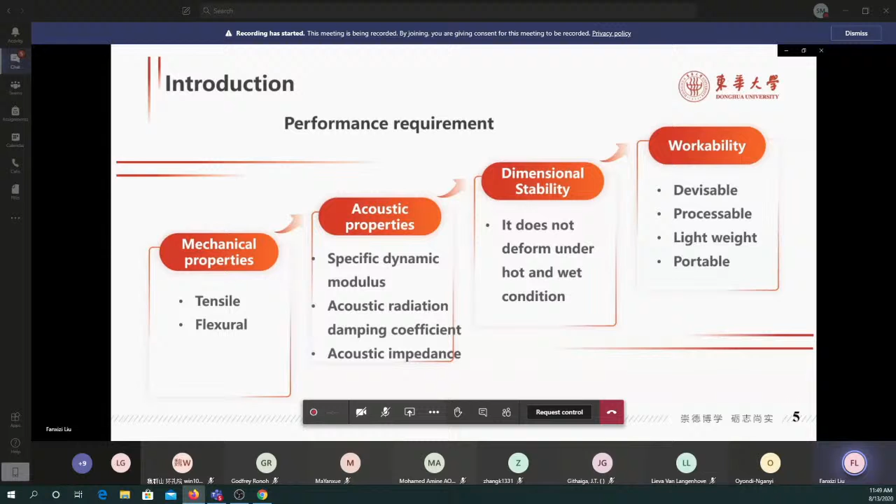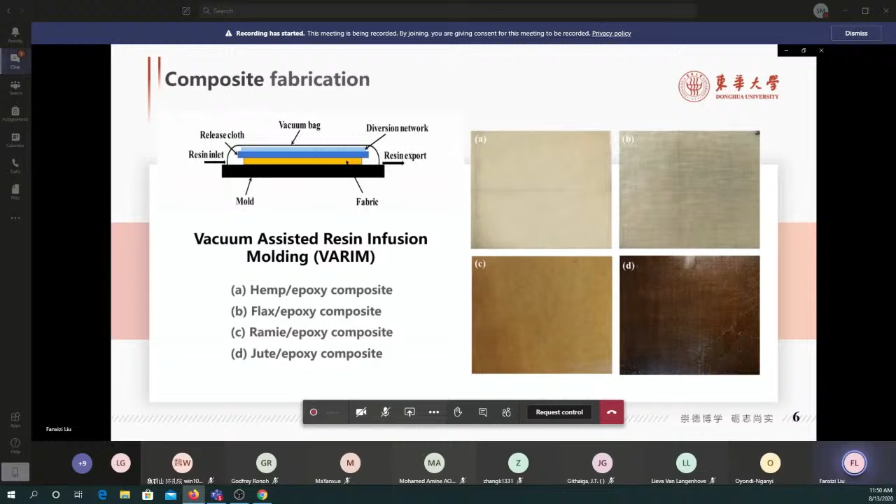In our studies, 4 types of epoxy resin composites reinforced with fabric of hemp, flax, ramie, and jute, respectively, are fabricated using vacuum-assisted resin infusion molding, VARIM.

The tensile properties of the composites were tested using a universal test machine instrument according to the ASTM D3039 standard. The flexural properties test was performed on the same machine according to the ASTM D7264.

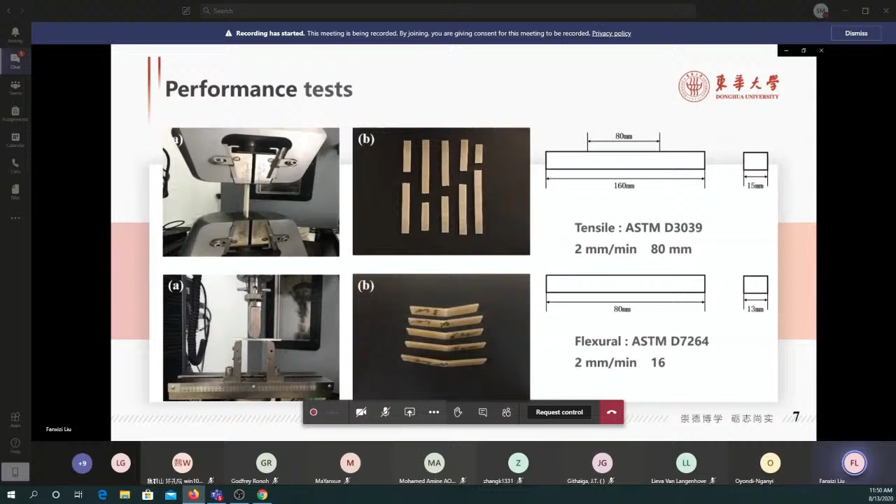It can be seen that the strengths and moduli of the 4 composite materials were larger in the weft direction than those in the warp direction, because the weft yarns were thicker and the weft fabric counts were larger than those of the warp.

The crimps of warp and weft yarns in the composite materials could reduce the utilization of the strengths and moduli of the yarn in the composite materials.

It's obvious that the warp crimps of the 4 fabric composites were significantly larger than those of the weft. Among them, hemp and flax weft yarns had little crimps, ensuring a high rate of fiber strength utilization, and the crimp angles of ramie and jute weft yarns were about half of those in the warp yarns. This could effectively increase the tensile strength and moduli of the composites in the weft direction.